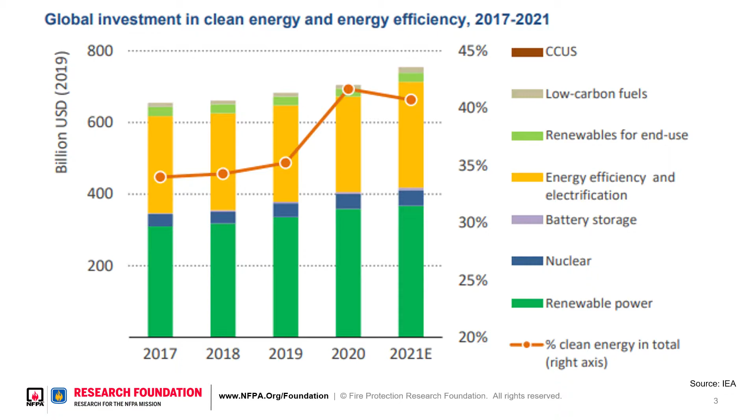Starting with the site, we're seeing a lot more presence of electric vehicles and other alternative fuel vehicles. We're seeing a huge surge in dockless electric bikes and electric scooters, which are all battery powered. We're seeing a huge rise in densification just in terms of what is on the site, which also poses challenges to the fire service in terms of access.

In building systems, we're adding a lot more infrastructure for electric vehicles and alternative source vehicles. We're also putting new energy sources on site, such as battery energy storage systems, photovoltaic panel systems, or building integrated photovoltaic systems.

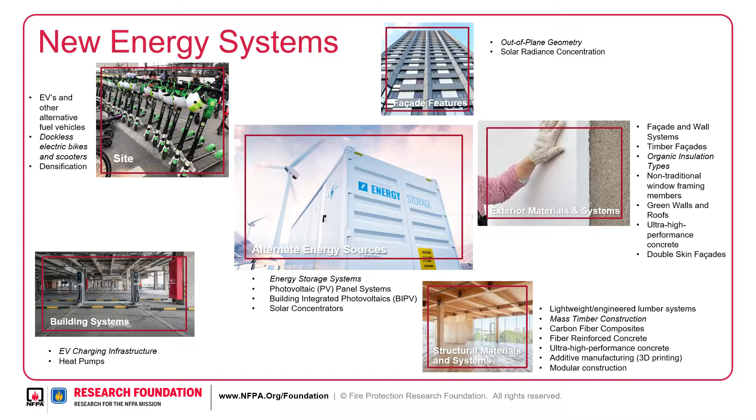So these are some of the trends we're seeing, all in support of getting new energy sources on site, having more energy efficient buildings and more sustainable facilities.

So what does this mean for fire safety? While we're fully supportive of green building products and systems, the fire safety community has been increasingly worried about the impact of these emerging products and technologies on fire safety.

Recent fire incidents indicate that the adoption of these systems can sometimes have unexpected consequences when safety considerations are not considered early enough in the development phase, or when unexpected combinations of materials are used to create and install systems outside of their original specifications.

Having fire safety take a back seat to other performance parameters in buildings isn't necessarily new, unfortunately. But fire safety always seems to be playing catch up with developments occurring in the construction industry. So even when we as fire safety professionals are aware of potential problems or concerns with new technologies, it oftentimes has to wait until there's some type of incident before the issue starts being addressed holistically.

Here I'm going to walk through some of the fire safety challenges we're seeing in some of these new energy systems that I showed on the last slide, and some of these green attributes of modern buildings today. Starting with the site, as I mentioned, we're seeing a big rise in electric scooters, electric bikes, and other small battery-powered devices becoming more common at both residential and commercial sites.

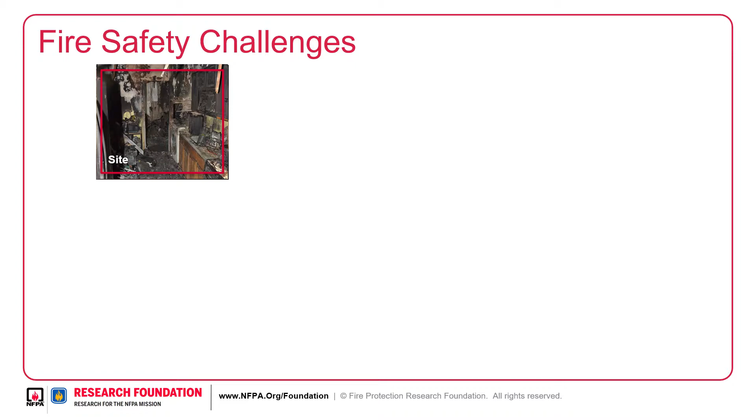When you look at this image, this is an apartment fire that burned down as a result of being sparked by a scooter battery. So the impact, even though it's a very small battery with a very small kilowatt hour, can have a pretty significant impact. We've seen this in others where the battery has exploded and caused a lot of damage in hotel rooms as well, as we're seeing people take these and charge them in their homes. So the uses of these are changing pretty drastically in terms of where these batteries are being taken.

Next, with building systems like EV charging infrastructure, this can present an ignition hazard while charging. We have seen some incidents of this, but there are a lot of proper mitigation strategies in place, like adequate shutoffs, shock protection, clear signage, etc. Taking all of that into consideration, they're generally considered a fairly low risk, but there is more research and testing needed to further quantify their contribution to the fuel load or the fire risk. We do have an active project underway at the foundation looking at electric vehicles and charging stations, particularly in parking garages and dense settings.

Going into battery energy storage systems, they're a very critical part of today's dramatic push for sustainable and renewable electrical energy, as they provide the means to store the energy produced by other sources. Since 2018, there have been over 40 incidents in these large scale systems like you see in this image, around the world. All of them have resulted in some form of failure, resulting in either a fire or explosion. So far this year, there have been 8 incidents in 2021 that have impacted a combined energy capacity of around 1.7 gigawatt hours—pretty large scope there.

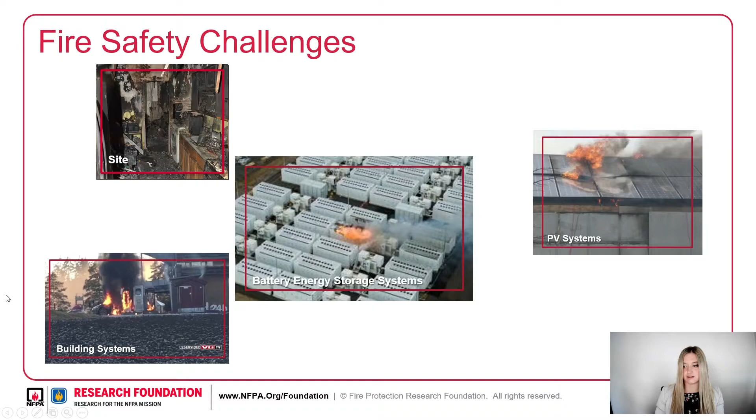Next, PV systems. I know you're going to hear quite a bit more about this today, so I'll keep it brief, but they can present an ignition hazard and can contribute to the fuel load. Largely, the percentage of these incidents with respect to the number of installations is fairly low, but they can present a shock hazard to firefighters. Research indicates that for roof mounted solar panels, the space between the roof and the installation can create a flue-like condition, accelerating the spread of flame. So the size of the space and angle of incline are very important parameters to identify the fire risk of this installation.

But there's a lot of research going on in this space, so I encourage you to look into that. Next is regarding facade features and exterior materials and systems. Adding insulation to buildings really impacts how a fire can develop within the building by keeping the heat in. Airtight buildings increase this effect and can produce pressure differences inside the building, which can pose an escape hazard and also challenges for rescue. Many of these new construction products are combustible and can potentially feed the fire. The Grenfell Tower fire in 2017 really brought this concern of combustible exterior walls and cladding systems to the forefront, and we've done a lot of research on this at the foundation. I know there's a wealth of other resources on that as well.

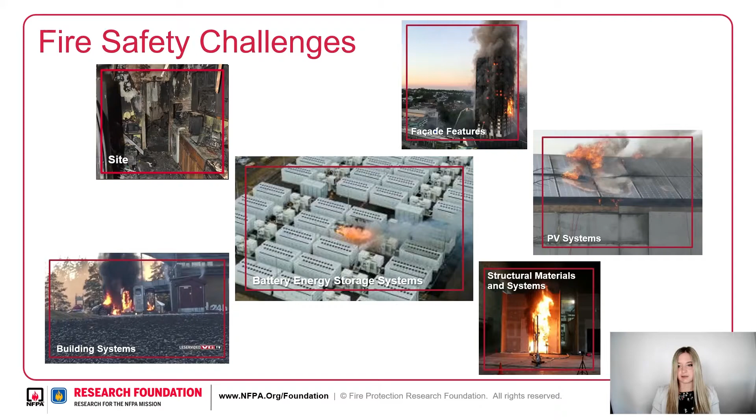And all of these attributes kind of make a building green. But the important thing to remember is that if it burns down and needs to be reconstructed, that's not necessarily green, right? So keeping fire safety at the forefront and making sure that we have all the testing methods, standards, and things in place to protect them is essential to being able to carry this forward. So with that, thanks for your time and attention.

We've done a lot of research on all of these topics that I briefly covered here. Those are all available at nfpa.org/foundation. And I provided a couple other specific sites related to our research on energy storage and PV systems if anyone is interested. So thanks so much for your time, and I will hand it back over.

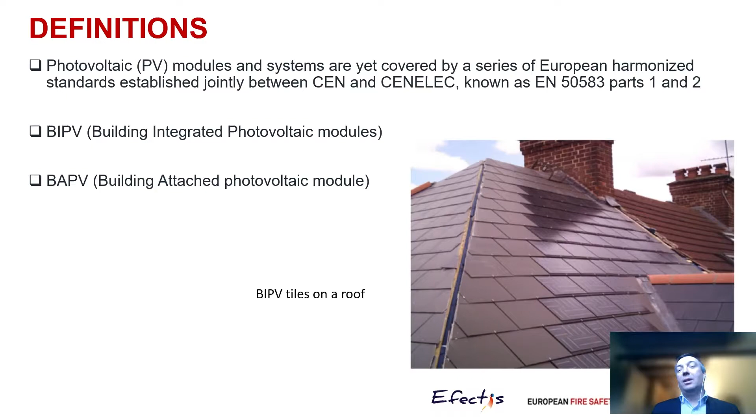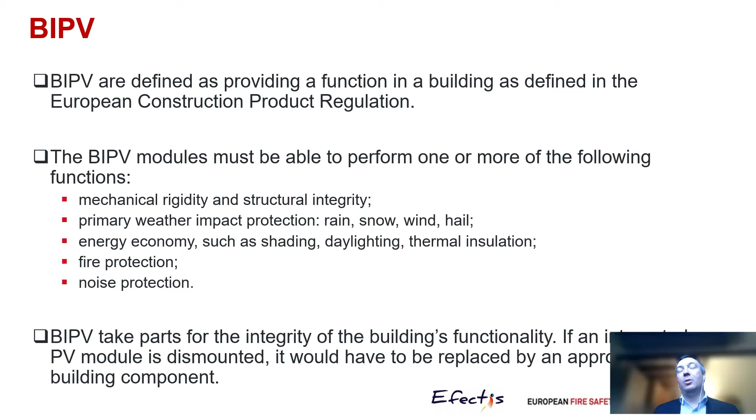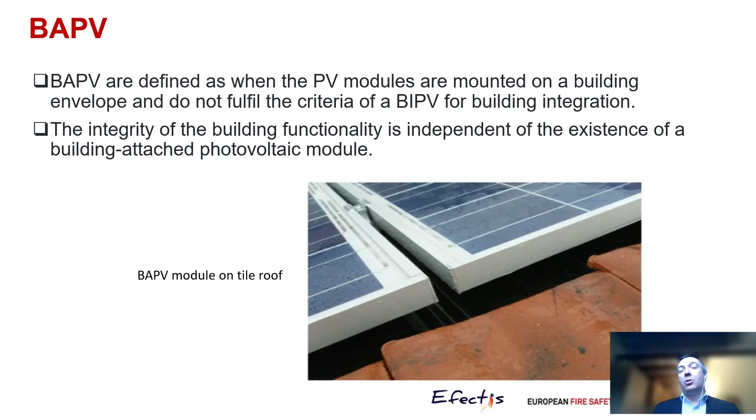In contrast, BAPV are defined as mounting over a building envelope. So it could be a facade, it could be a roof, and so they are not really integrated. In this case, the picture shows you the BAPV module on a tile roof.

Next, we have to discuss ignition scenarios with PV modules, even BIPV or BAPV. So this is an electrical system, so you have to respect the national electric codes that are in place in the different countries to limit overload and short circuit. But all this part that is called smart grid is sometimes difficult to manage because it's direct current. It's not necessarily alternating current. So management systems are a little bit different.

Then we have two families of sources of fire, the internal sources to the PV components and the external sources. The internal sources cover arcing and hotspots, but also some other very specific effects to PV cells, which are called mismatch. It's a question of misalignment or reverse current in a module. So you could have, for example, when you have a partial lighting of a PV panel, such kind of effects. And you could also have lack of or bad connections among modules, strings, and inverter that could generate weak points for the start of a fire.

The external sources include all the classical building fires, such as flames impinging on the facade from windows, but also on roofs. And you could also imagine external fires, for example, a car burning in front of a building, or fires from wildland areas, and how it works at the neighborhood level. In this case, the combustion or ignition could be made by direct flame impact, by radiation, by convection, and sometimes by firebrands, which is an important point, especially for photovoltaic systems that are close to wildland areas.

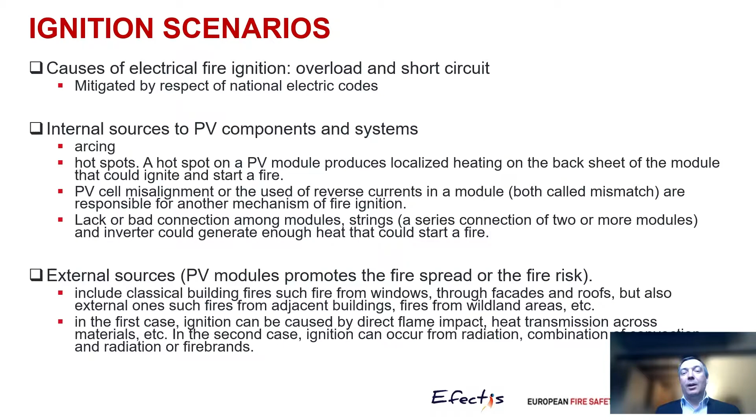The performance requirements could be divided at module level and at system level. At module level, we have panels that may have to comply with EN 61730 Part 2. This standard describes several tests, including fire tests, and especially MTS 23, which is a test that is requested only by the manufacturer. So it's not mandatory, but the test itself is based on UL 790. And you will see a little later in my presentation, it's very similar to the other roof tests we have around the world. But what is important is that you have very few harmonized sets of requirements, but it doesn't mean that you have no local or national building codes that integrate requirements on PV panels.

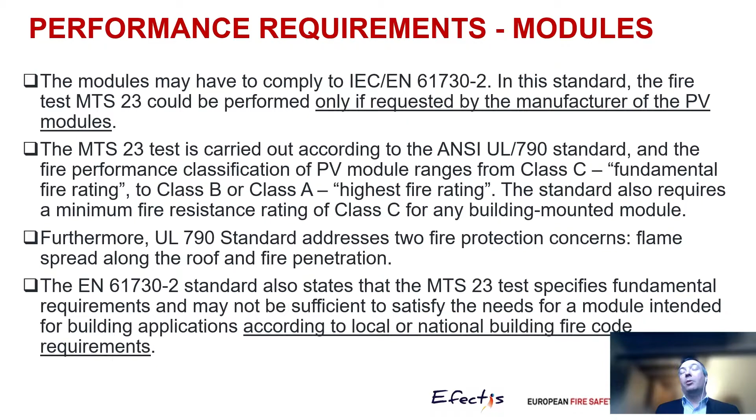At the level of the product, the series EN 50583 requests Euroclass level E, meaning a small flame on the different components. I mention that because very often on the market, we don't necessarily see the evidence of tests for that, especially of the impact of the small flame on the different locations. And there are a lot of different locations, including the back and so on, that matter. In some cases, especially for BIPV panels, they are also part of the building envelope, so they have to meet the requirements for this envelope, which may be fire resistance tests or roof tests.

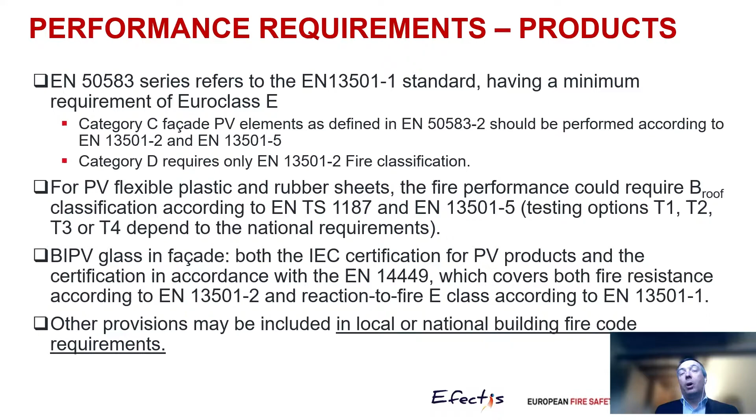We have a series of specifications like that, but as you probably know, the specification is not harmonized for roofs at present. And we also have several product standards. I mentioned the one considering BIPV glass in facades that already covers fire resistance tests according to EN 13501 Part 2, and really a classification that is a reaction to fire one. And other provisions may be included in local or national building fire requirements.

So I just give you some examples of the tests that are applied on photovoltaic systems. Here it's a BAPV system, and the test follows a standard that is CLC/TR 50670. Normally the test is done on a dummy inert roof, but here it was a little different, applied to see the interaction between a roof complex and the PV module, because there's a strong interaction between both components. So in future developments, to understand the fire risk, we have to integrate the interaction between the photovoltaic panel and its substrate.

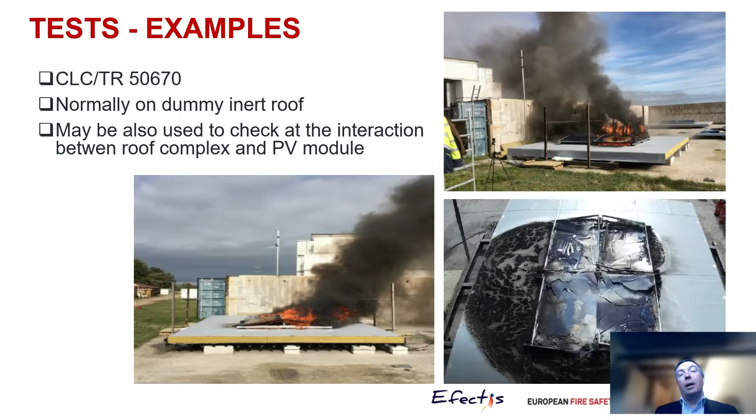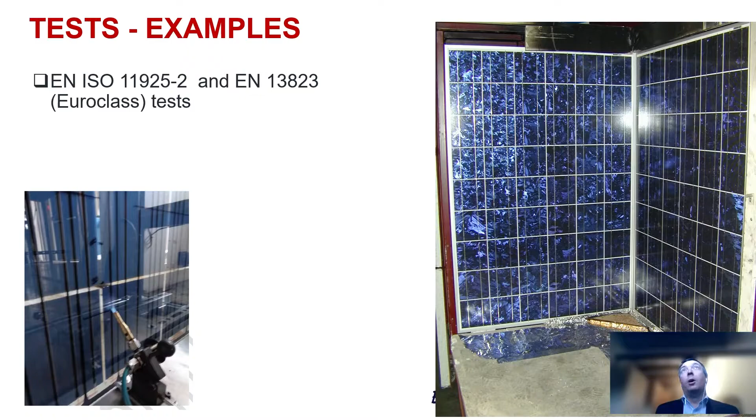Here, these are examples of determination of Euroclasses for PV panels. On the left, you have a small flame impacting cells. This is how we determine the E class for the panel. We put the small flame at different locations, including different plastic elements, on the front and on the back, and so on. On the right, it's an SBI test performed on PV panels, and this comes from certification rules available for France. And the last example is the roof test according to TS EN 1187. It's test 3, the French test, and there's a French protocol available for that.

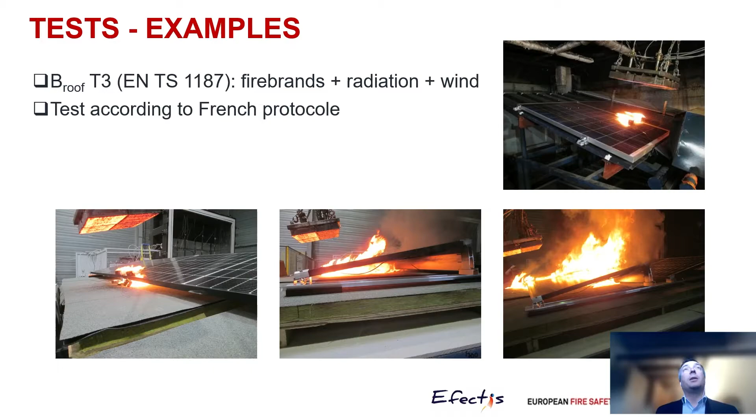So normally we have to fulfill these different requirements on the market, but very often there's still work to do for the control and so on. So it gives you just an idea of what the existing requirements are for these photovoltaic panels, and I remain available for more questions or details during the roundtable. Thank you.

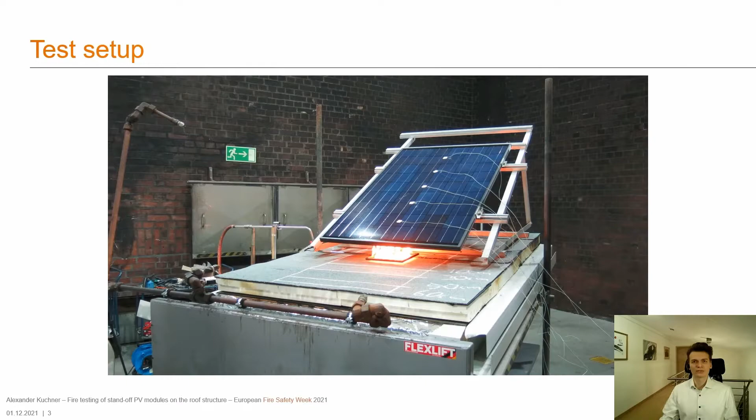On the next slide, you can see the test results of two comparable roof structures with different insulation types. The first point shows the test result of a class A2 insulation according to EN 13501 with a mineral fiber insulation material. The second point shows the test result of a class C insulation with a thermoset foam insulation material, also called PIR insulation. The middle image shows a flame spread during the test, and the right image shows the test result and the damage of the insulation after the test.

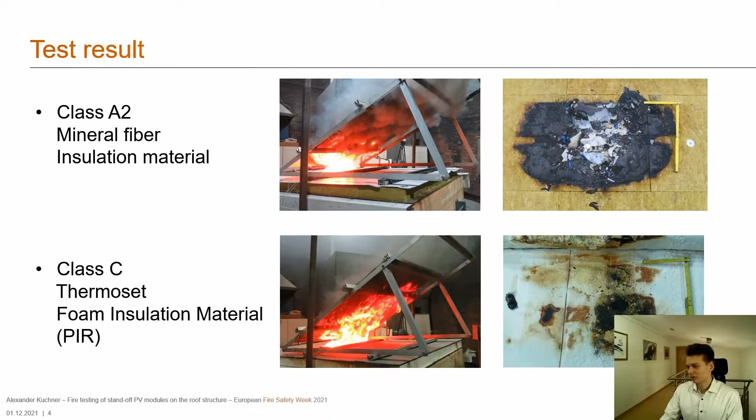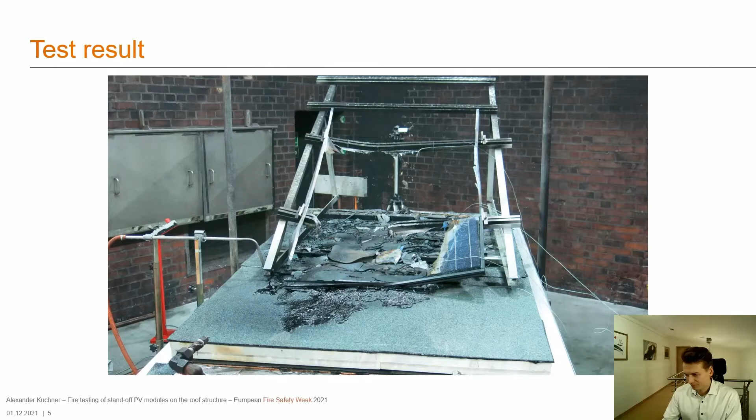To sum up the main points: it has been shown that the use of the square gas burner as an ignition source provided a constant heat release and better reproducibility compared to wood wool. The damage pattern on the insulation materials is comparable, and none of the tested insulations contributed significantly to the fire. In general, the performance of different PV modules differs from each other, depending on the design and especially the materials used. In conclusion, for the safe implementation of the energy transition, the fire protection requirements for PV modules have to be re-evaluated.

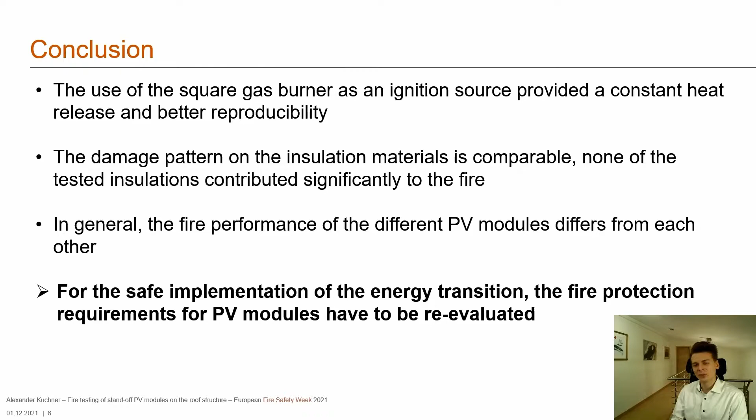Hello, everyone. My name. Okay. Okay.

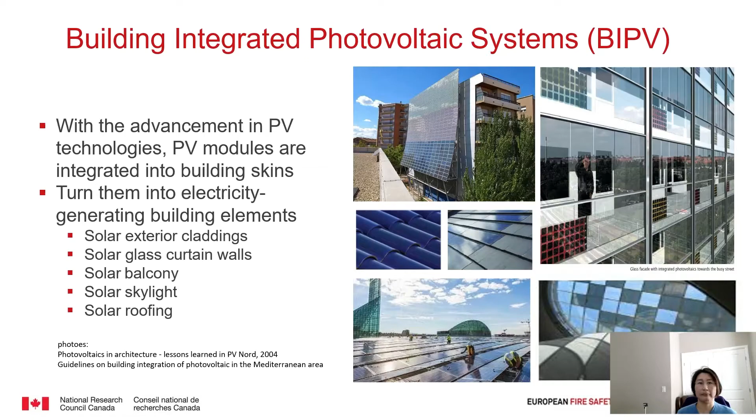Thank you. So with advancements in PV technologies, PV modules are, as we know, integrated into building skins, turning them into solar cladding, solar glass walls, solar skylights, solar roofing, and so on. And these solar products not only generate electricity, but also constitute parts of buildings. Next slide, please.

So what makes BIPV products more vulnerable than other regular building materials is that fire can originate from the BIPV due to physical causes like cell damage and cracks, environmental causes like shading, dust, moisture ingress, and electrical causes like hot spots, arcing, and so on. In victim scenarios, BIPV can catch fire by being exposed to external fire sources, arson incidents, and so on. So fire risk of BIPV should be addressed, especially for electrical safety of PV modules to prevent fire originating from the PV modules, but more importantly, for fire resistance of PV products as building components, to limit fire spread to the building and neighboring buildings, and to allow safe egress.

However, BIPV standards do not yet provide PV-specific fire resistance requirements in detail, but they refer to local building codes. As Eric mentioned, for example, EN 50583 refers to EN 13501, which is actually developed just for normal construction products and building elements.

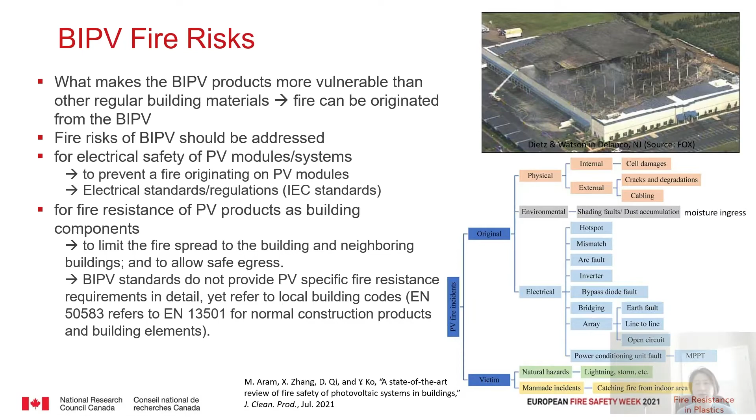PV modules, as we know, are made of multiple layers: a top protective layer, often glass or plastic, encapsulants, solar cells, and back sheets. These encapsulants, like EVA, are reportedly the main combustible components, and some back sheets are known to be flammable as well. Construction materials are required to be evaluated for their fire behavior, combustibility, ignitability, heat and smoke generation, and flame spread. Therefore, BIPV products need to be tested as well.

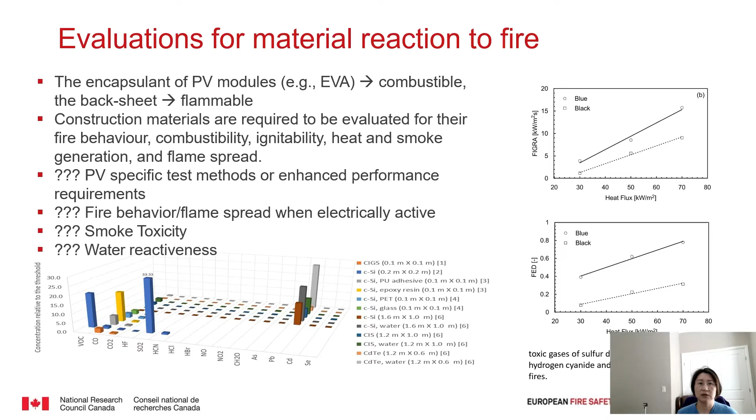Smoke toxicity should not be underestimated as well, since gases of sulfur dioxide, hydrogen fluoride, hydrogen cyanide, and VOCs were detected from PET laminated PV fires. So another issue is also the water reactiveness of these BIPV products.

Following the reaction to fire requirement, you also need to check the resistance to fire requirement for building structures and elements. First, the resistance to fire originating from BIPV should be addressed in BIPV designs. For example, solar wall cladding can self-ignite, so requirements for a barrier might be needed, particularly for BIPV claddings or curtain systems, to resist potential fire spread coming from the PV cladding itself. This is similar to the thermal barrier requirements currently in the International Building Code in the States, where a cladding system containing an insulation layer requires a barrier to separate the cladding from the interior side of the building.

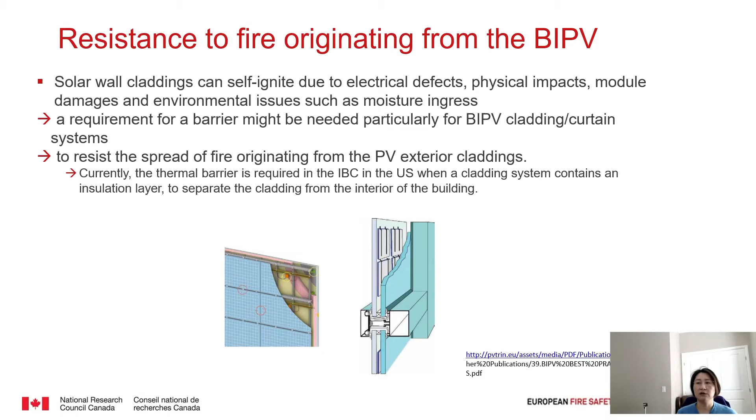Next, the resistance to fire exposure from within a building. Any cladding system mounted shall not affect the fire resistance of the primary exterior walls. This also applies to solar claddings.

Now, in the case of solar glass curtain walls installed when a fire rating is required, the BIPV curtain wall shall be tested by the standard fire resistance wall test using the wall furnace. Some questions arise: are the current failure criteria and temperature criteria still applicable to BIPV? For example, the temperature criteria state that temperature rise should not be greater than 140 on the unexposed side, but we know that during normal operation, BIPV could be heated up to about 100 Celsius. So all these questions are still unanswered.

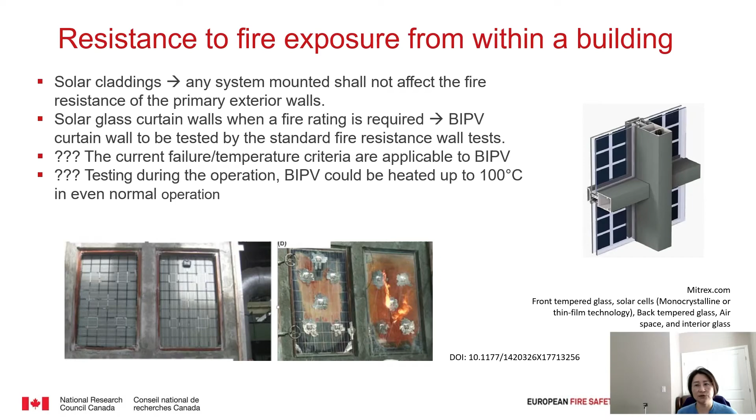Resistance to fire spread on the exterior of BIPV facades. Facade fires are a big concern, as we know, and smoke and flame can propagate rapidly via the cavity space behind combustible claddings. In the case of BIPV facades, fire spread via cavities is also a concern, and this could be attributed to the PV operation temperature, the combustibility of PV and substrate layers, and the design of the mounting system. Usually the cavity system for BIPV is designed for cooling the PV from temperatures of normal operation.

For vertical fire spread, current local building codes require combustible claddings and curtain walls to pass large-scale facade fire tests like ISO 13785 or NFPA 285, exposing the BIPV products to a window flame fire scenario, as you can see from these photos. So the question remains: are these test methods and their criteria right for examining BIPV facades?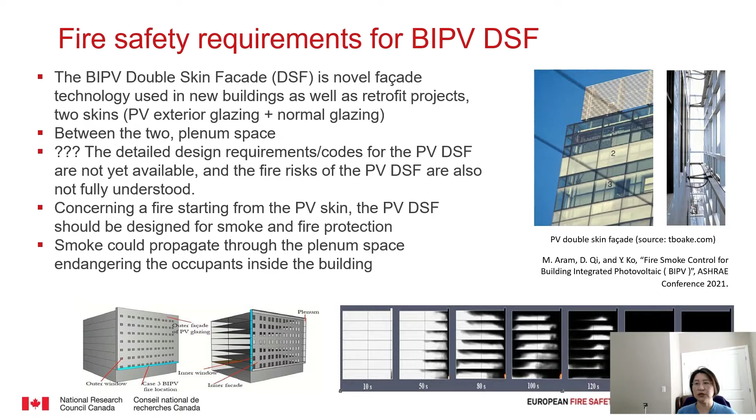You can see the two skins: one, the exterior layer, is a PV exterior glazing installed outside of the primary normal glazing. Between these two skins there is a plenum space. Currently there are no detailed design requirements or codes available for PVDSF, and the fire risk of PVDSF is also not fully understood. Concerning a fire starting from a PV skin, the PVDSF should be designed for smoke and fire protection. This figure at the bottom of the slide is from a modeling study conducted to investigate smoke propagation through the plenum space, and the results are quite concerning, as we observed significant smoke spread from the PV through the plenum space, potentially endangering occupants inside the building.

In conclusion, the fire safety requirements and testing methods for BIPV as building elements and building structures relate back to local building code standards. Unfortunately, current building code standards are developed only for ordinary construction buildings, not for BIPV products. Therefore, meeting the requirements in current building codes or standard test methods does not verify the fire safety of the BIPV products and systems.

The current fire safety test and performance requirements should be re-evaluated in application to BIPV, since there are so many unique challenges posed by BIPV systems. It is necessary to develop requirements considering the actual burning behavior of PV modules, particularly when they are electrically active in normal operations. New standard test methods or guides are necessary also for potential toxic smoke hazards, any additional fire protection system requirements for fire detection, fire suppression, and safe occupant evacuation, as well as for firefighting considerations, including tactics and potential electrical shocks.

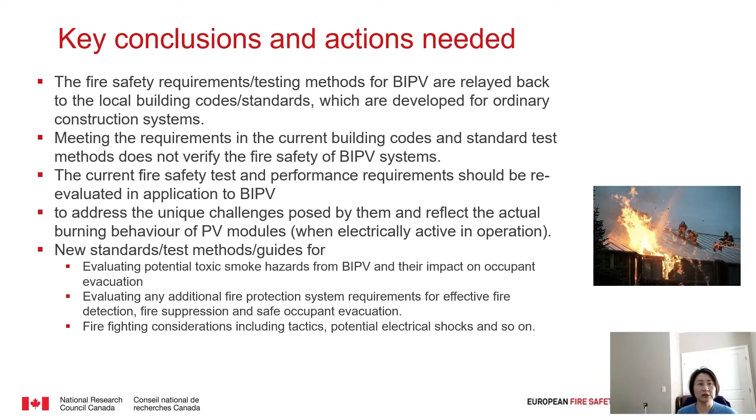Thank you so much. Contact me if you'd like more detailed information on the presentation I made today.

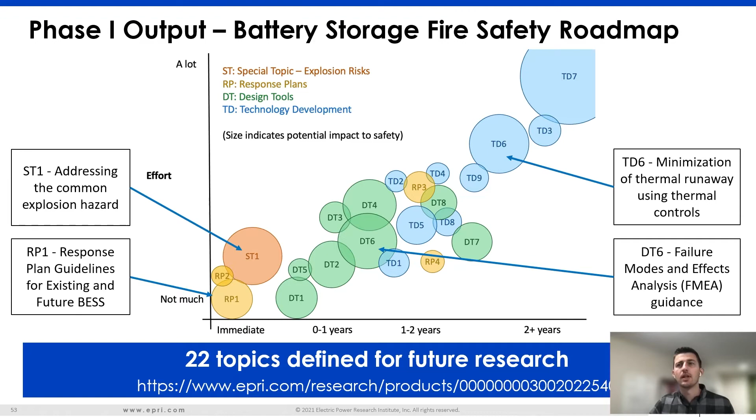And so that safety roadmap is a public document that we've developed. So I'll put a link to that in the chat as well. It's at the bottom of the screen here. So you can download that, and it discusses these topics in more detail and the approach that might be needed to address those different topics.

The way that EPRI is going to start addressing these issues, the roadmap isn't EPRI specific. There are things in there that EPRI can't do, such as developing new technologies that will sit more with the technology vendors. But there's a lot of things that EPRI can do, and the way we're approaching this is what we're calling the Project Lifecycle Safety Toolkit.

What we're recognizing is that as we're developing and deploying these systems, there's a need for tools that can be used to increase the safety of systems at all the different aspects of the project lifecycle.

Everything from what we now know about the battery off-gas plumes during a failure event. We've had some recent large-scale failures in the world that have shown the need for a better understanding around those plumes that come off during a failure.

If you understand that well, it can inform your planning, siting, and system design to mitigate the impacts. Again, I've mentioned explosions, and an example of how we've begun to address some of the explosion hazards is that we take this approach of identify, educate, and then enable.

Identifying was this safety roadmap. We've identified these topics that we think are important to the industry. The second step is to educate, and one public resource we put out recently is this explosion hazards white paper.

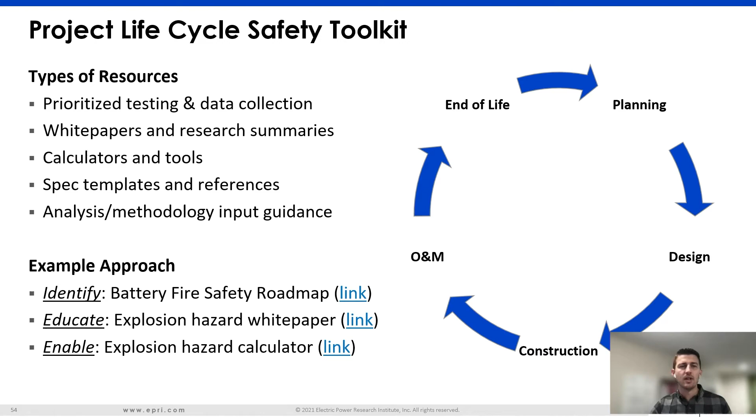Real quick, I wanted to mention this is our project that's doing that. It's called the Energy Storage Fire Prevention and Mitigation Project, and the way we structure it is that it's collaborative, so we want lots of people participating in that research.

We had 15 different utilities in our first phase and a number of people across industry, and that helps us get better research. So that's the type of research that we're doing there.

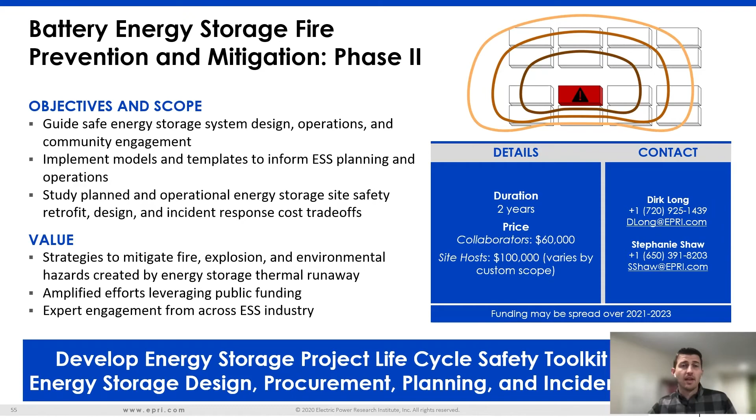Another thing I wanted to put up has a few more links in it for resources we've already created, some of which are public and some for purchase, but we're trying to create resources that are public facing that the industry can use to better inform the safety of these systems and create safe energy storage deployments over the next few years.

And so with that, that's kind of my presentation. My contact information is here if there are questions after this, but I'm really glad to be able to participate. Thank you.